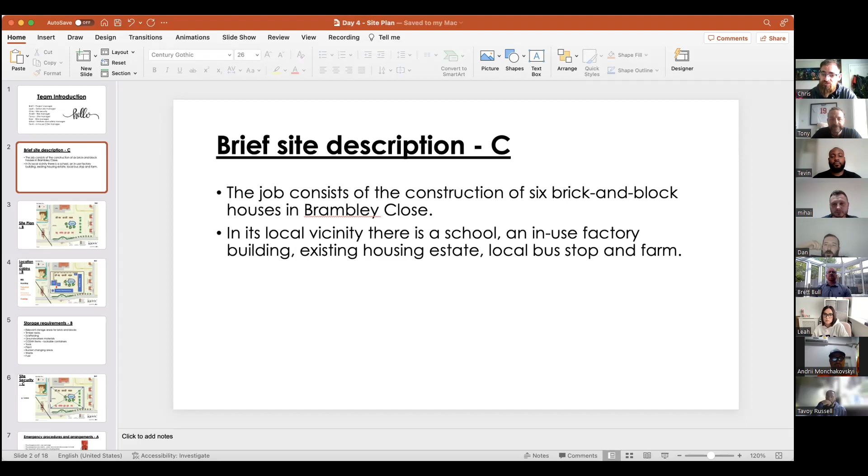Yeah, sorry, my role. A quick brief site description. The job consists of a construction of 6 brick and block houses in the Brambley Close area. It is in the local vicinity, and there is a school, a factory in use, some existing housing estates, and also a local bus stop and farm. So the next slide is the site plan. As you can see from the site plan, we will be developing the 6 brown coloured plots, which are located to the left of the build. And we will also be installing the infrastructure of the main road into the development for future developers as well.

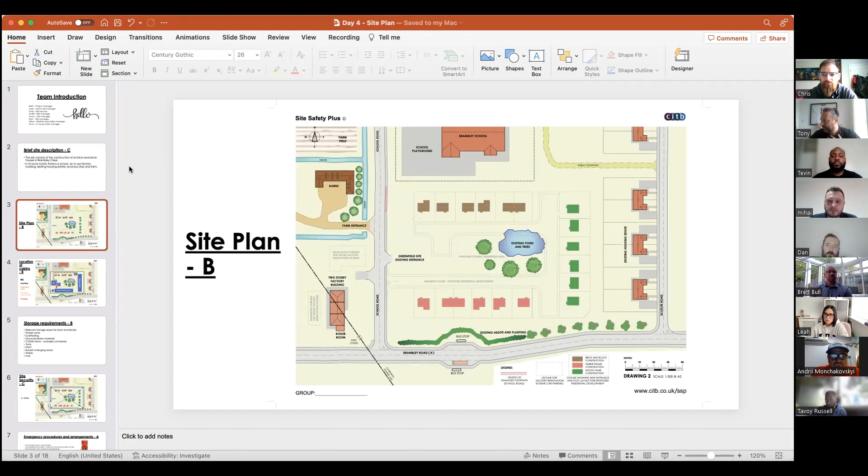Location of site cabins and storage areas on this next slide. So we will be altering the entrance to the development. We'll have the welfare facilities on the left-hand side and adequate storage areas and parking around the development. So the relevant storage areas, we're going to have ample storage for bricks, blocks, timber racks, all the scaffolding, groundworkers materials. We're also going to have COSHH items on the site, so they will be contained in lockable containers. We'll have storage tools, areas for plants, and we'll have bucket changing areas. We'll also have a waste area as well on the development, and also a fueling area on the development.

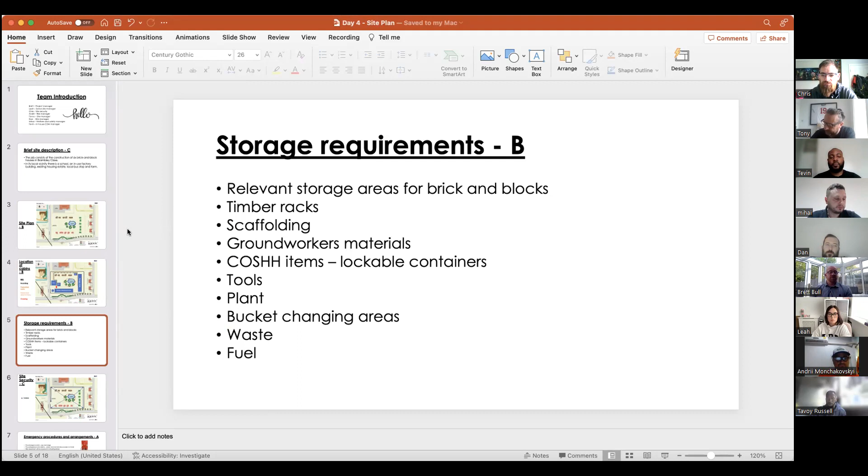Right, straight on to the site security, where we will have a barrier of a hoarding fence made of solid wood, not your Heras fencing, where we will situate a 360-degree panoramic camera in each corner to cover the site, and also 1 camera on the site entrance next to the steel lockable gates.

So emergency procedures and arrangements that we have. Basically, we have the fire emergency plan, which we will see on the next page after I finish talking. The fire extinguishers and alarms, we have water, CO2, and dry powder. Fire extinguishers in total, 12 of them. Risk assessment will be required for all fire extinguishers. Designated fire marshal will be Leah. First aiders will be all supervisors who have actually the 3 days first aid course necessary for site.

Rescue plan will be discussed within the site induction, and we have a 3-tier accident plan. First, for the small injuries, as example, cut fingers will be dealt with by the first aiders on site. Second tier, hospital injuries will be initially dealt with by a first aider, and transport will be arranged to the hospital if they are unable to take themselves. And third tier, medical attention needed on site. If they are unable to go to hospital, arrangements will be made for medical personnel to attend site and take control of the scene. So basically the ambulance.

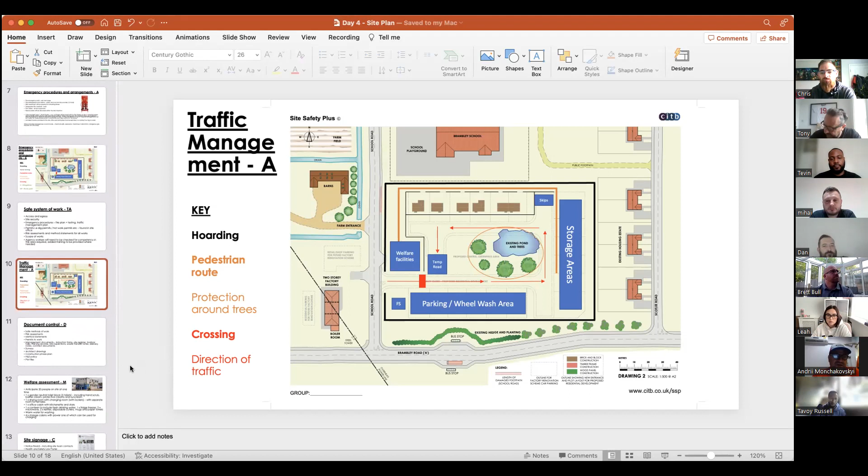Most files, for example, health and safety, RAMs, method statements, permits to work, and hot work permits are regularly updated for insurance purposes, but also for site and health and safety inspections that may occur at any time. All other relevant documents can be found around the work site, for example, the information board. Thank you.

Hi, today I will speak about the welfare assessment. We decided to have 4 containers, anticipating that no more than 20 people will work on the site at the same time. So related to that, we will have one of the containers used as a block with toilets. In it we'll have 5 toilets. All the toilets will have wash basins with hot and cold water. We will also provide toilet paper, soap, hand towels, barrier cream, sun cream, and hand scrub.

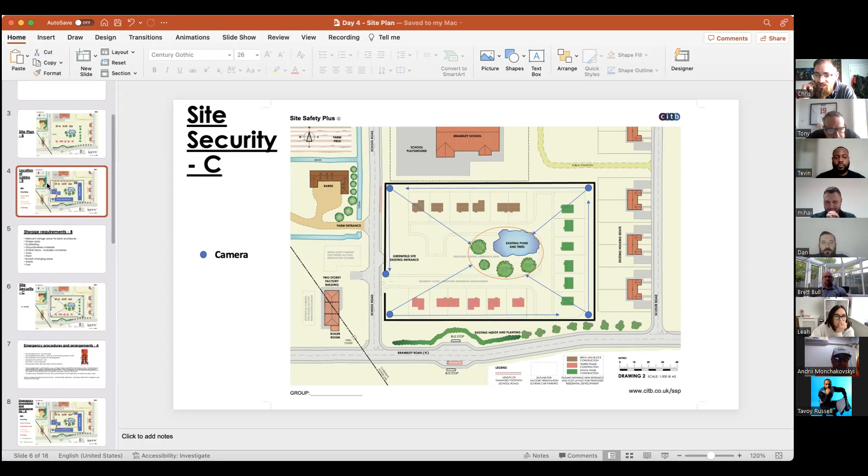Also, with your security, Chris, how are we actually getting people on and off site? We've got a pedestrian gate as well as a main gate at the site entrance, but we're also going to have a signing-in shed just in case. We can have biometrics, but I don't trust them because something could go wrong, so we're going to stick to traditional signing-in with your card number - a CSCS card number.

So was that? I'm going to jump over to Tevin now.

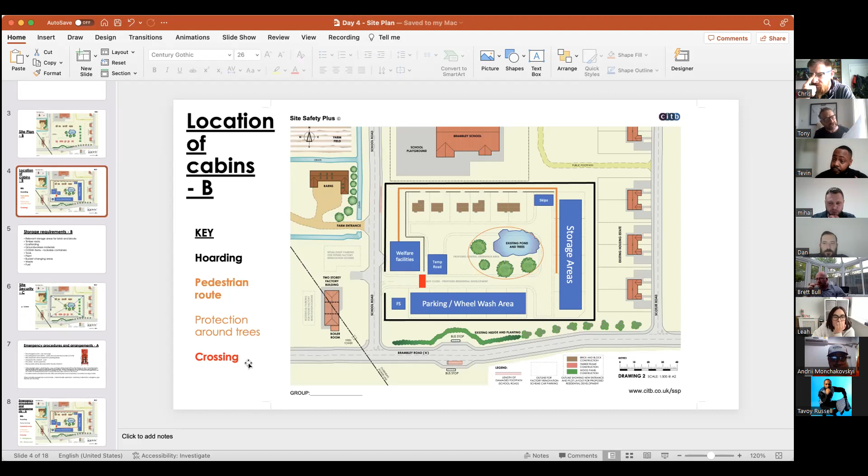Tevin, was CSCS cards part of the site rules? You went through the site rules quite quick, and I didn't manage to write them all down. No, apologies. It would be a part of it, and as a part of the induction process of following the rules, you would need to provide your CSCS card, especially to be able to do skilled work. We won't have a labourer participate in doing skilled work, so we will do a background check on that and store that within the office as well.

So you're gonna add that to the site rules and also make sure it's part of the induction procedure. Yeah, because you've got attend site induction at the top, sign in, sign out. You've also got on there in terms of be trained and competent for the task as well. So that will be a part of that, and to provide and also review the RAMs as well as sign off. Before any works can commence, you will need to follow that procedure, part of the induction process.

Brilliant. Okay, I'll bounce back to Chris then.

Chris, seeing as you brought up CSCS cards, will they still be eligible in 2024? That's a joke. Well, we don't know yet. Have you researched it? Have you researched it? Maybe we have. I have researched it, yes, and I'm still waiting for some answers on it. Yes, me too, me too.

But at the moment, the actual people who run the CSCS course, they actually don't have an answer on it yet. Exactly. Yeah, they've sent a bulletin out that you and I have both been privy to, but that's about all it is at this stage, a bulletin.

Yeah, okay, thank you for that. Thank you for that, Chris. Yeah, sorry sir, yes, carry on.

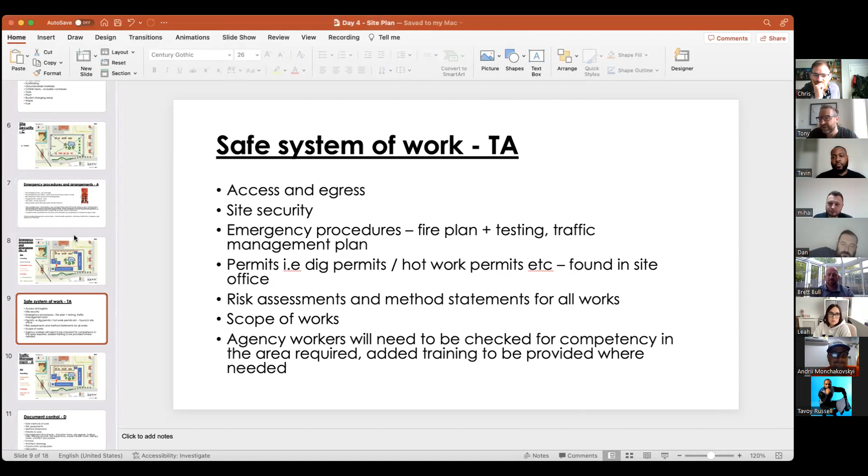That leads me neatly back to you, Andrii. You did mention deliveries, and later on it mentioned that there'll be delivery times or times to avoid for deliveries.

I've got a question for you, Andrii. If a delivery turned up... yeah, there it is, thank you. Whoever's doing that, is that you, Leah? Thank you. So we've got no deliveries before 8:30 or after 3:30.

Okay, let's take the 3:30 as an example. Sorry, 3 o'clock - let's take the 3 o'clock delivery time. You get a delivery and it turns up after 3 o'clock. What are you going to do with that delivery?

They actually get turned away, and we will be issuing fines if it's a reoccurrence. But what if it wasn't the driver's fault? The roads are shocking these days - it might not necessarily be the driver's fault.

Reschedule for another delivery, will be stipulated on all delivery requirements. So if the driver is not going to make it, then he does need to turn away. Yes, Leah, would you like to add to that?

Within our documents, we create purchase orders where we stipulate exactly what we're ordering from a supplier. We make sure that the terms and conditions of that purchase order, which will also be signed by the supplier, will clarify that our delivery times are between 9:30 and 3, due to schools around and the local area.

So if the driver was then unavoidably delayed, even though they might try and plead ignorance, saying I didn't know that was the rule - let's say they turned up at 3:15, your gateman is going to say no deliveries. And where are they going to go? So they're going to come back the next day then, presumably going to try and get booked in the next day. But they've traveled a hell of a long way.

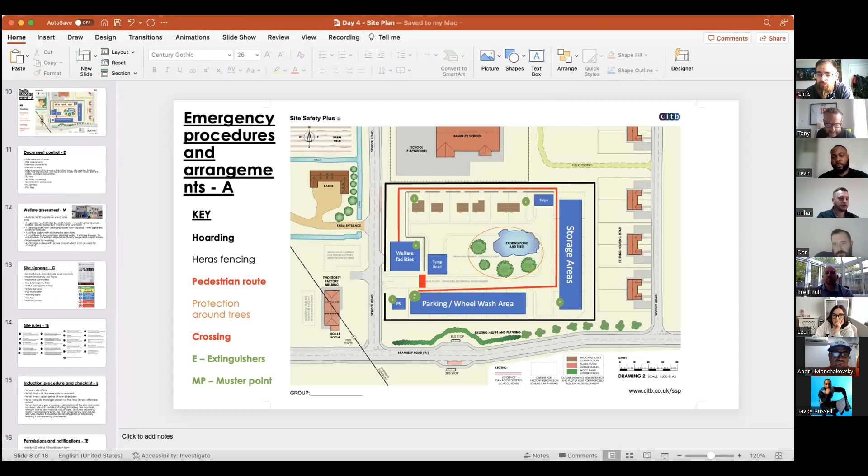You mentioned the toilets would be gender neutral. Yes. Personally, I'm not a fan of gender neutral toilets, but that's a personal thing, for the simple reason I wouldn't want my daughter, my mother, or my wife following these dirty builders into a gender neutral toilet. But that's a personal thing for me. There's no right or wrong on that. That's your decision to go gender neutral. But you did mention you would have female only changing areas.

So in a few weeks' time, you've started work and you have somebody come to site who is identifying as a woman, transgender. Can they use that female only changing area? Good question. Actually, this situation is going to come one day, and you need an answer to this because this is coming. I'm not even joking now. This is a thing. Let me stay in character. We have other contractors we've used in the past, and this is real life for them. So the way I see it, they cannot.

Yeah, it's a very political hot potato here, isn't it? And I don't expect you to answer that right now. Yes, Chris, would you like to come in on that one? If that situation does arise, then we will look to putting in gender neutral changing rooms as well. Right. Because obviously we can't ignore the political fact and be prosecuted. It needs some serious observation, because nobody would like to offend or upset anybody. Of course we wouldn't. But by not offending or upsetting one group of people, we could start offending and upsetting another group of people. So we've got to be very sensitive there. I have my personal opinions on that, which I'll keep to myself until we've stopped recording.

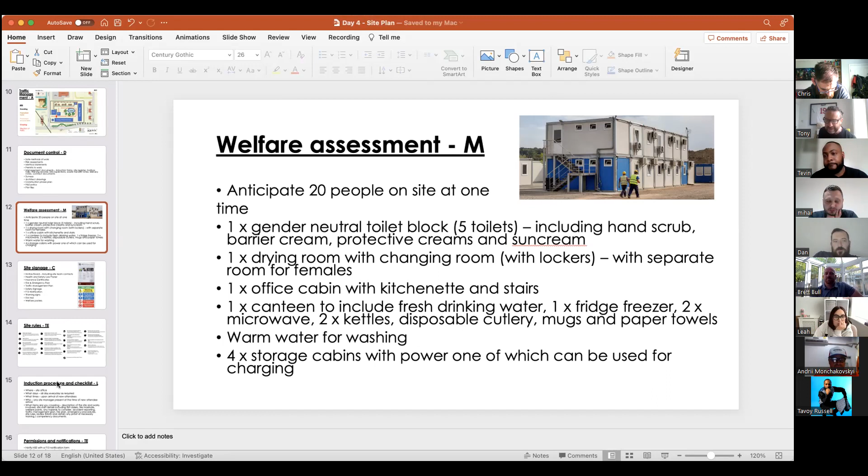You mentioned on your site rules, Tevin, abusive language. Yes. Okay, what are we classing as abusive language? Any kind of profanity, any kind of vulgar language, homophobic language, or bullying. In a sense, we are working in the public sector. We have a primary school full of children, from ages 5 to 11, I believe, and you do not want that to be picked up on at all.

Okay, Tevin, staying with that, or anything that's on the screen there, break the rules. What happens? What's your procedure? In terms of breaking the rules, one of the site team will take you into the site office and have a little discussion, and you'll be warned. After that warning, should you repeat offend, it will be followed by the yellow card, red card system. Sometimes, at the site manager's or site team's discretion, depending on the actual foul play, you can just be sent away straight away, and we'll get in contact with your management. So for serious breaches, it could be straight off site. 100%. Okay. Thank you. Question for Leah on the mental health policy. Great policy, by the way.

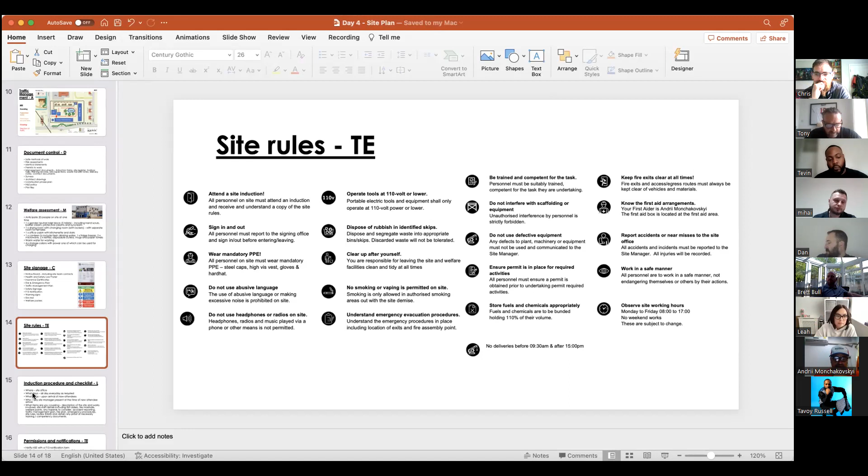Great initiatives. Friday Focus. I particularly like that one with the, who doesn't like pizza. I just wondered, one of the first signs for a lot of people, not everybody, is excessive drink and recreational drug consumption. I'm just wondering whether you'd have considered drugs and alcohol testing during the project. I didn't see it in here. Was there a reason you decided not to go for it? I'm just wondering what your thought process was around that.

No, it's something that we can do. It's not within that because I wanted to focus specifically on the mental health, what we want to do, rather than focusing on that. But I would suggest that we could do that if we had signs. I wouldn't necessarily want to straight away drug and alcohol test everyone, but the people will all know what we need to look for. If we then do notice these things, we could then have a discussion, and if it continued, we may then have to obviously do some kind of testing if it continued too far, and we'd have to look into that.

Yeah. Okay, and last question for Dan, and then we finish. I can have a coffee break.

Last question for Dan. Nice list of documentation, Dan. I'm just wondering if you'd actually thought, as a client, we get guided around. We often get invited into the site manager's office, and we see a nice, sexy filing system. I'm just wondering whether you'd actually broken that down into individual files, and if so, what sort of numbers were you talking there, Dan? Because that to me just looks like a huge collection of things that if I walked into a storage room, I would just see them and it'd be quite confusing. So did you actually break it down into numbers of actual individual files that you might have?